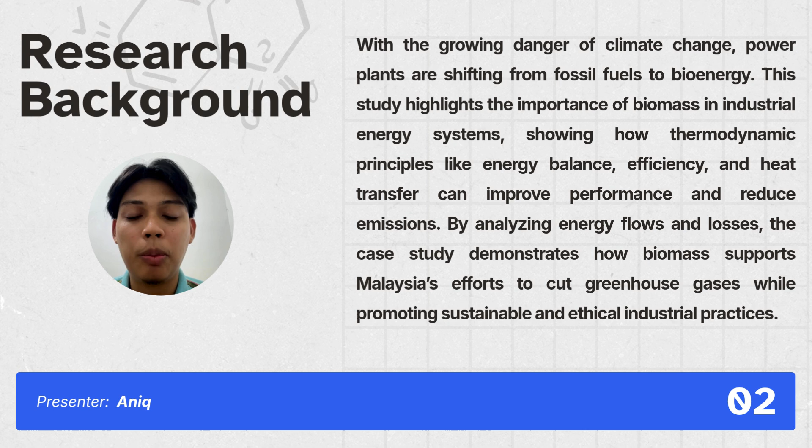Introduction. This is background. With the growing danger of climate change, power plants are shifting from fossil fuel to bioenergy. This study highlights the importance of biomass in industry and energy system, showing how thermodynamic principles like energy balance, efficiency, and heat transfer can improve performance and reduce emission. By analyzing energy flow and loss, the case study demonstrates how biomass supports Malaysian effort to cut greenhouse gases while promoting sustainable and ethical industrial practice.

Why is sustainability so important? Firstly, biomass relies on organic material. If harvested unsustainably, this resource can be depleted, leading to soil degradation, deforestation, or reduced food security. Secondly, sustainable systems aim to maximize conversion efficiency, high energy yield per unit of biomass, while minimizing waste heat and emission. This aligns with the principle of reducing entropy generation in energy systems.

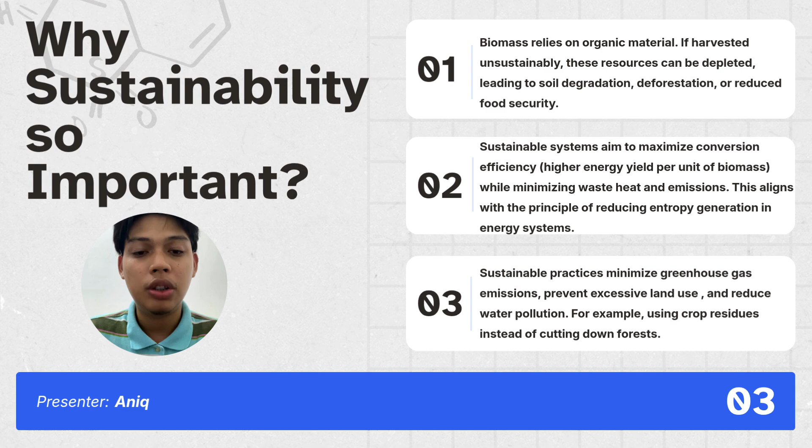Third, sustainable practice minimizes greenhouse gas emission, prevents excessive land use, and reduces water pollution. For example, using crop residue instead of cutting down forests. So now we will look into the thermodynamic analysis. For our case, it is biomass gasification of banana peel for syngas production.

Here, we show the energy balance for the banana peel gasification. So for this study, we use banana peel as our biomass. 1 kg of banana peel, if fully combusted, can release somewhere about 15,000 kilojoule of chemical energy. From the energy, it is distributed into three parts. First, the syngas. It will produce around 12,000 kilojoule of syngas energy, and then 2,000 kilojoule of heat loss, and then 1,000 kilojoule of the production of byproducts such as char, tar, and ash.

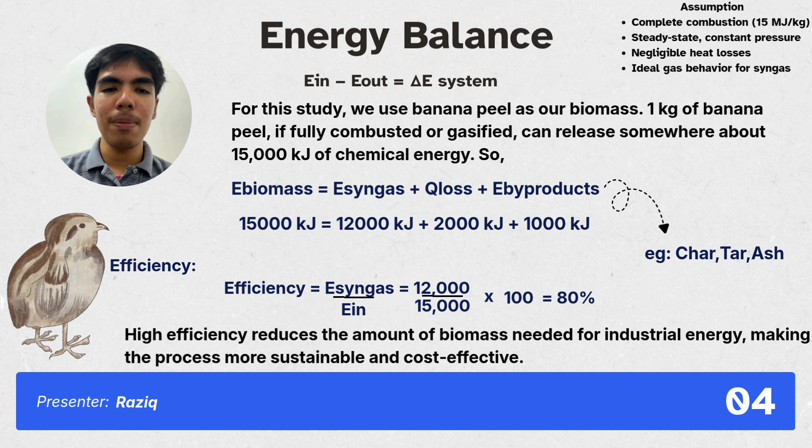So from this given value, we calculated the efficiency by dividing the energy of the syngas over the total input. So 12,000 kilojoule over 15,000 kilojoule, and then times it by 100, we will get 80%. So 80% shows that it is very high efficiency. High efficiency reduces the amount of biomass needed for the industrial energy, making the process more sustainable and cost effective.

Now, we will look at major energy losses in the banana peel gasification. First, about 1,000 kilojoules are locked in byproducts such as char, tar, and ash. This happens because not all carbon reacts, leaving a solid residue behind. Second, around 2,000 kilojoules are lost due to irreversibilities and inefficiencies. Real processes are not ideal. Friction, turbulence, incomplete mixing, and chemical reaction inefficiencies consume energy and reduce the useful work.

Lastly, moisture content in banana peel also contributes to the losses. Part of the input energy is used to evaporate moisture instead of producing syngas, lowering the effective heating value compared to the dry biomass.

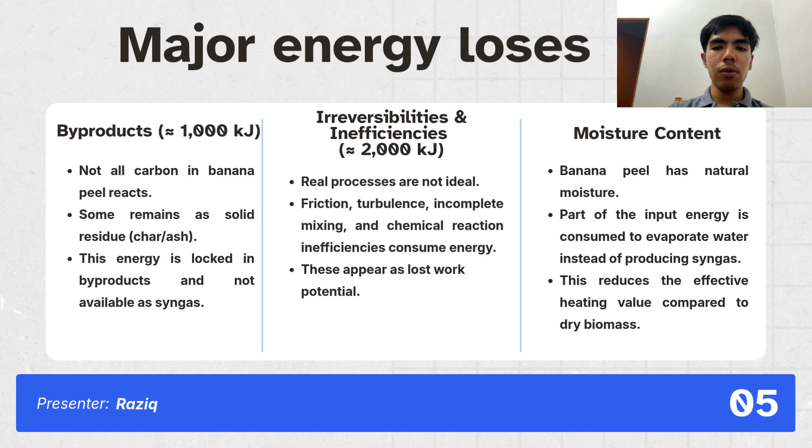This diagram shows the energy flow diagram for the biomass gasifier based on the first law of thermodynamics for an open system. So the input is the energy of the biomass, and then it will be converted into three outputs. First is the useful energy, the energy of the syngas, the byproduct energy, and then the heat loss to the surrounding. The overall balance is expressed as the energy of the input is equal to the energy of syngas plus the energy of char, which is the energy of byproducts, and then the Q loss.

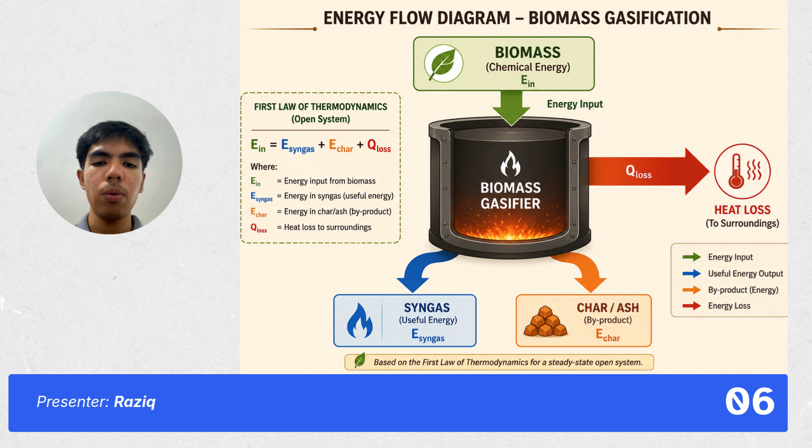This highlights how energy is conserved and distributed in the process, with syngas as the main useful output, while some energy is inevitably lost or locked in byproducts.

Now, let's talk about sustainability evaluation. Environment impact. Firstly, energy waste. Inefficient combustion or incomplete gasification can lead to wasted energy in the form of unburned carbon or low quality syngas. Other than that, heat losses during conversion reduce overall system efficiency.

Secondly, emissions. Biomass generally has lower net CO2 emissions compared to fossil fuels since the carbon release was originally absorbed during plant growth. Resource consumption. Firstly, water and energy inputs. Pre-treatments like drying and grinding consume energy. Other than that, some processes may require water for cooling or scrubbing, adding to resource demand.

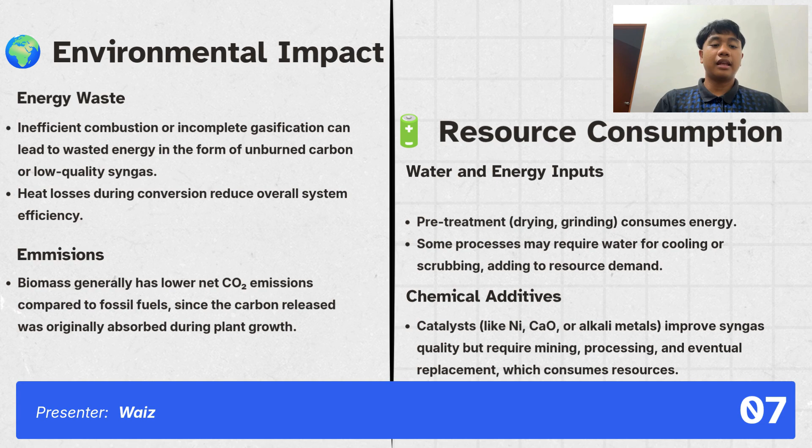Secondly, chemical additives. Catalysts like Ni/CaO or alkali metals improve syngas quality but require mining, processing, and eventual replacement, which consume resources. There are 5 potential improvements that can be done. First, pre-treatment. Drying to reduce moisture, improving conversion efficiency.

Other than that, heat recovery. Capture waste heat from syngas cooling or reactor walls to preheat feedstock or generate steam. Furthermore, hybrid system. Couple gasification with solar thermal or other renewable input to reduce fossil energy reliance. Next, advanced gas cleaning. Remove tar, particulates, and harmful compounds to lower emissions and improve syngas quality.

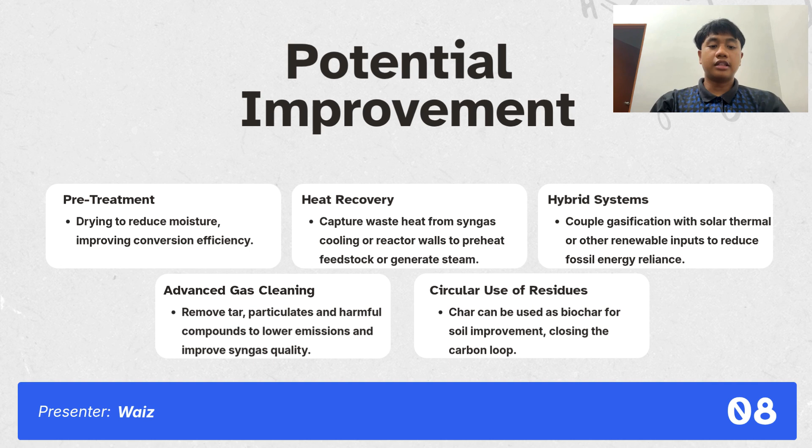Lastly, circular use of residues. Char can be used as biochar for soil improvement, closing the carbon loop. Now we move to proposed engineering solution. The first solution is implement heat recovery. It relates with the first law of thermodynamics. It states that energy can be neither created nor destroyed. It can only change form.

The way we implement heat recovery is by employing high efficiency compressors, blowers, and pumps. Another one is insulate reactors and piping to reduce heat losses. The second solution is optimize process conditions. It relates with enthalpy balance. To optimize process conditions is to maintain optimal temperature range from 700 to 900 Celsius for complete gasification. Another one is control air-fuel ratio to balance oxidation and reduction reactions.

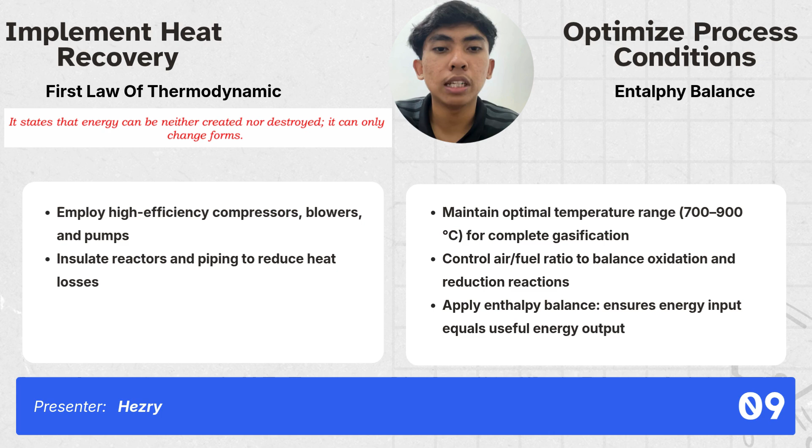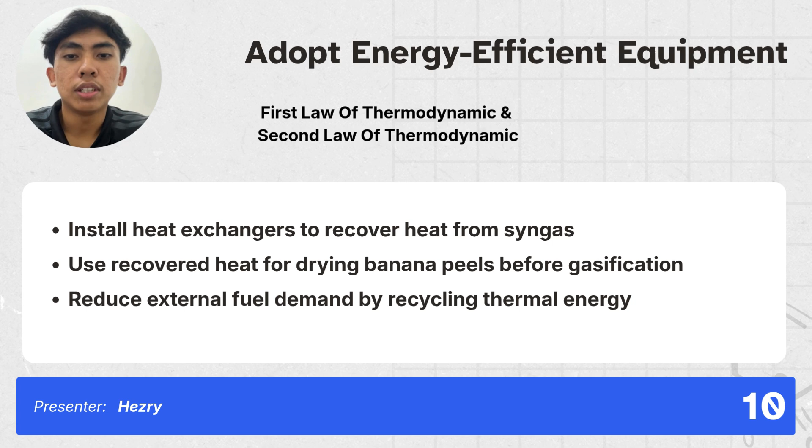Lastly, apply enthalpy balance. It ensures energy input equals useful energy output. The final solution is adopt energy efficient equipment. It relates with the first law of thermodynamics and second law of thermodynamics. We can apply this by installing a heat exchanger to recover heat from syngas. Another one is use recovered heat for drying banana peels before gasification. And finally, reduce external fuel demand by recycling thermal energy.

Next, we move to ethical and value-based consideration. For environmental responsibility, engineers must minimize emission, energy waste, and ecological damage. Thermodynamics shows us that energy degradation is inevitable, but responsible design reduces entropy generation and pollution. For example, using waste heat recovery instead of venting into the environment.

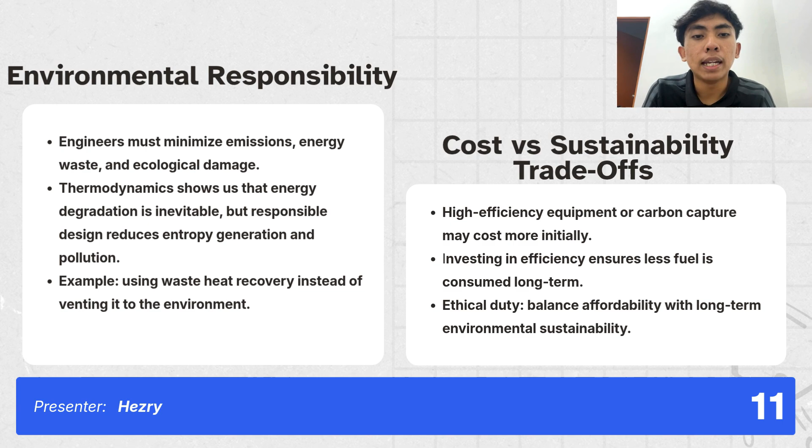For cost versus sustainability trade-off, high efficiency equipment or carbon capture may cost more initially. Investing in efficiency ensures less fuel is consumed long-term. Ethical duty balances affordability with long-term environmental sustainability. Impact on workers, society, and future generations. Safer and cleaner processes protect workers from harmful emissions. Sustainable energy systems reduce societal health costs and preserve resources for future generations. Irreversibility today accumulates as burden tomorrow.

Lastly, professional ethics of engineers. Engineers are bound by codes of ethics like prioritizing public safety, honesty, and sustainability. Applying thermodynamic principles responsibly ensures designs are not only efficient but also safe and fair. Ethical engineering means choosing solutions that serve society, not just profit.

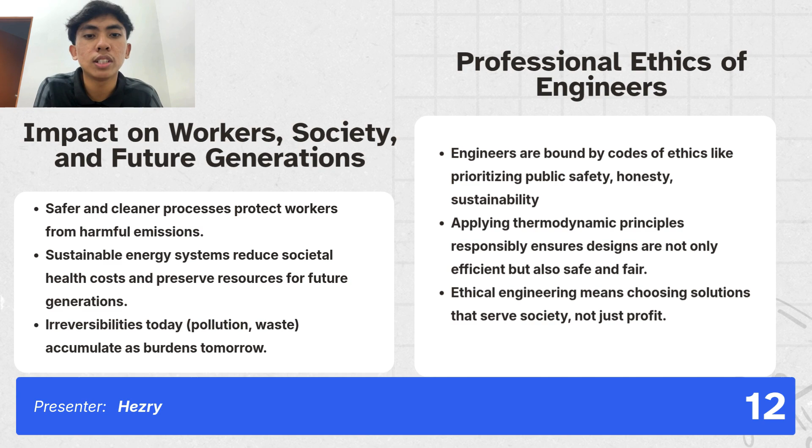Conclusion and recommendation. The analysis shows that while chemical energy can be harnessed from biomass gasification, the second law of thermodynamics limits the fraction that becomes useful work due to entropy generation, with part of the energy lost as irreversibility, heat, and byproducts. Efficiency improvements such as heat recovery, process optimization, and energy efficient equipment help reduce entropy and improve sustainability.

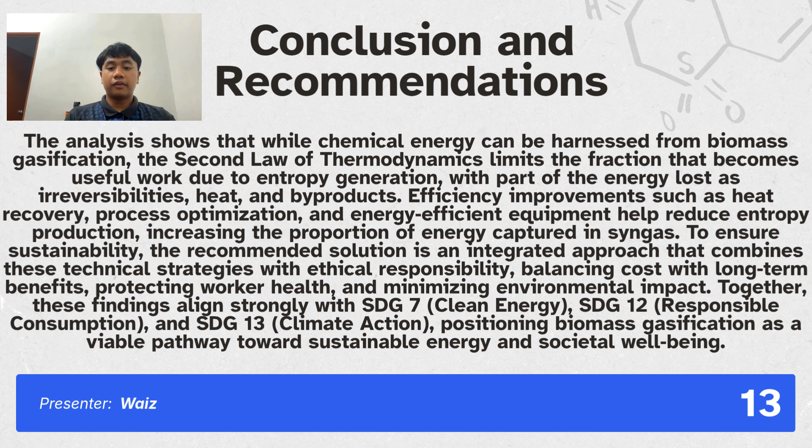The recommended solution is an integrated approach that combines these technical strategies with ethical responsibility, balancing costs with long-term benefits, protecting workers' health, and minimizing environmental impact. Together, this finding aligns strongly with SDG 7, SDG 12, and SDG 13, positioning biomass gasification as a viable pathway towards sustainability, energy, and societal well-being.